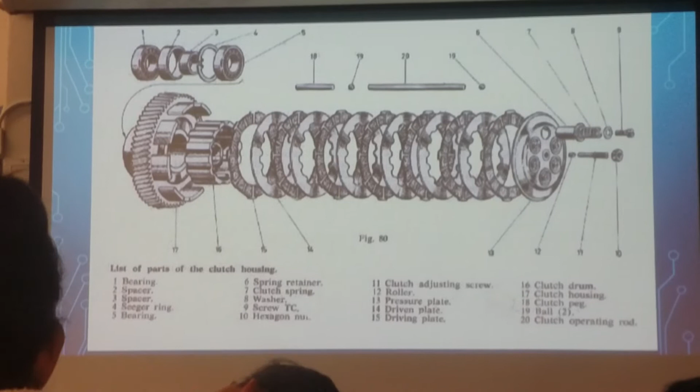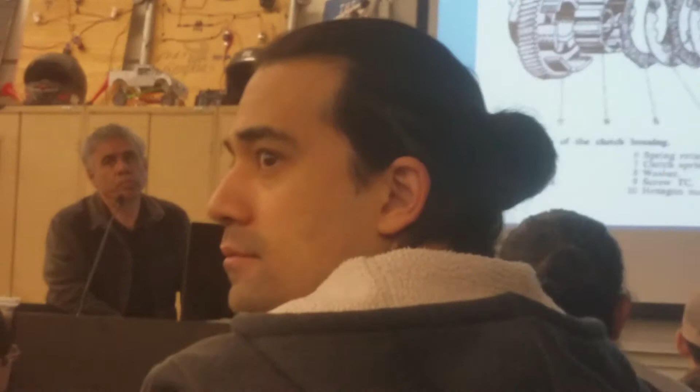Guys, when you say slippage, clutch slippage, that means what? The RPM is getting high. You can see it on the cluster, yes, but the speed is very slow. Yes. Slip is never here. Gears are not gonna slip. Gears are something else. Slip is gonna take place in the clutch. Slippage, that's what I meant with slippage. Yeah. Gears jump. Yes. That's like the worst thing. Somebody doesn't have power at the higher end. Yeah, different reason.

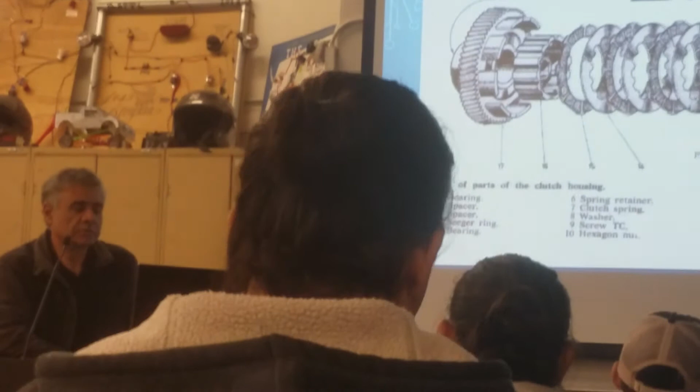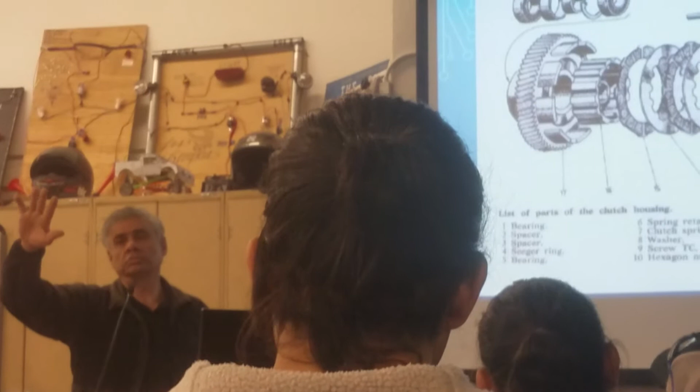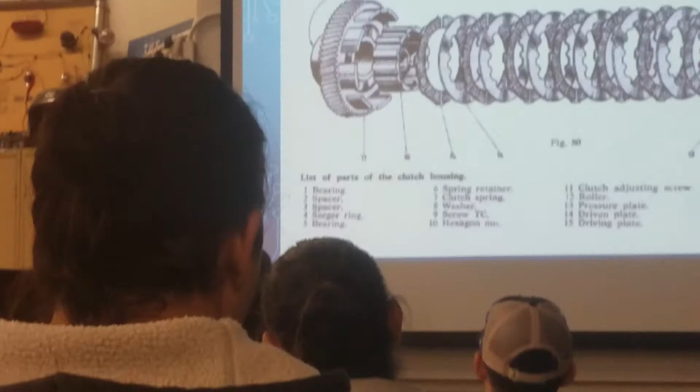Guys, I'm asking some questions. Master technicians, listen to me and answer me. If you have clutch slippage, what would be the problem? Give me 5 things right now. Worn drive disc. Somebody else, go ahead. Worn out drive disc, like the material on the disc. What else? The springs. If the springs are weak, guys, remember that. If the springs are weak, it doesn't give enough force on these pieces, it's gonna slip.

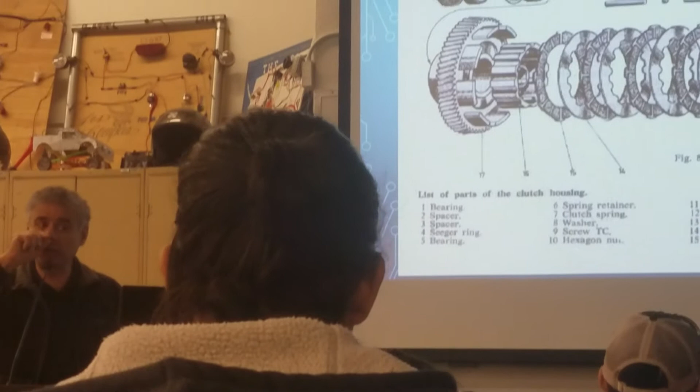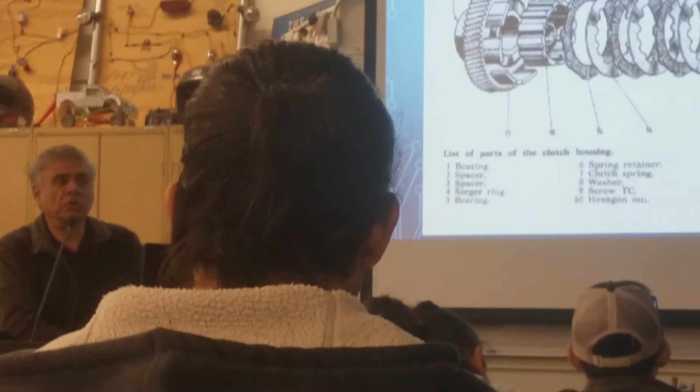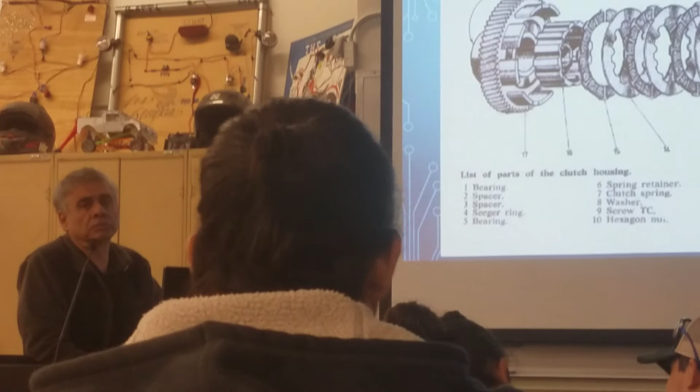So that's why the spring, when you guys order the clutch kit... They're not always springs though. Sometimes they're spring plates. If you get the kit from the dealer, did I get the kit from the dealer before, or did I get it from online? eBay. Get the kit from the dealer and see the springs in the new kit. They come with the clutch, friction plates, steel plates, and the springs. But the springs are weak.

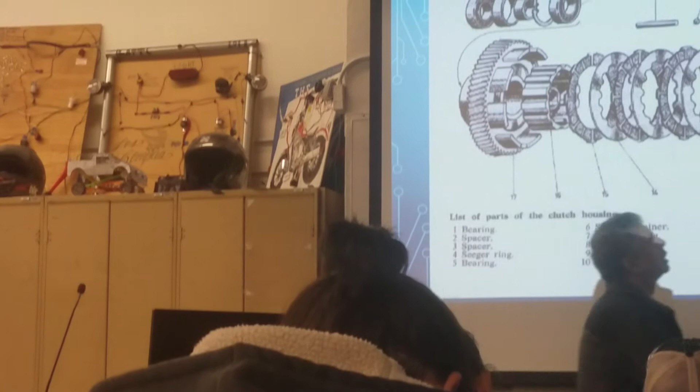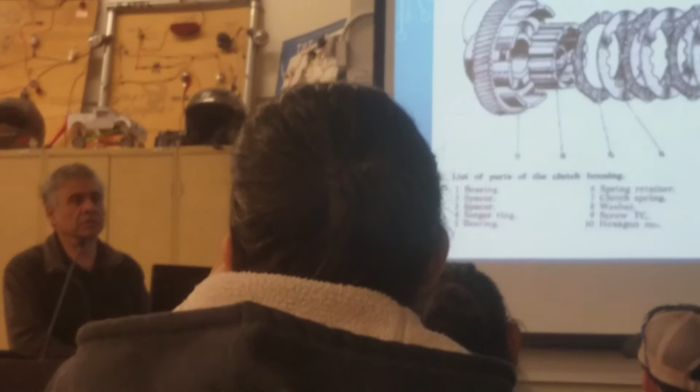What can make the spring weak? Like this one, how many springs do you have? You have 5. What can make a spring weak? Yeah. This one is called fatigue. Remember that term, it's called fatigue. Yeah, so you keep compressing the spring on and off 100 times a day. Over time, the spring is getting weaker. Now it doesn't give enough force to compress all these pieces together.

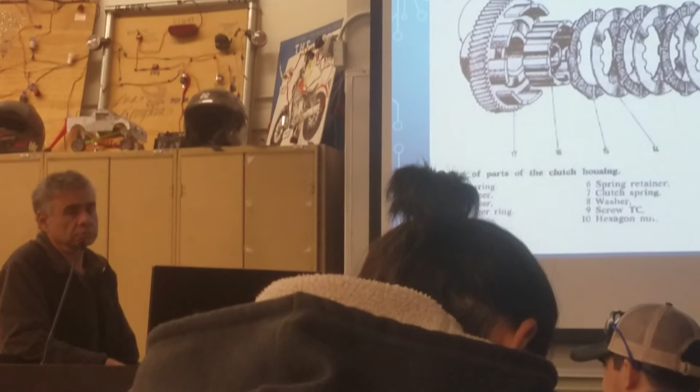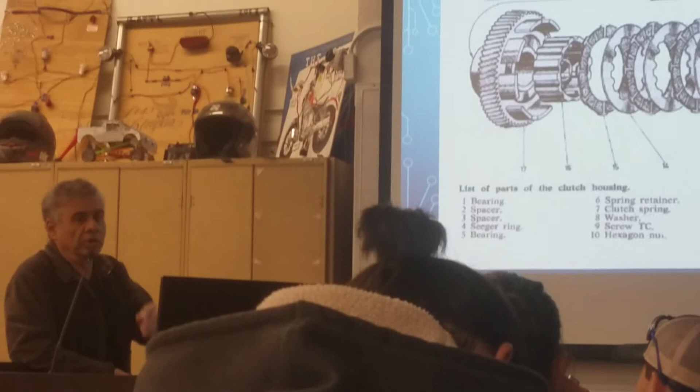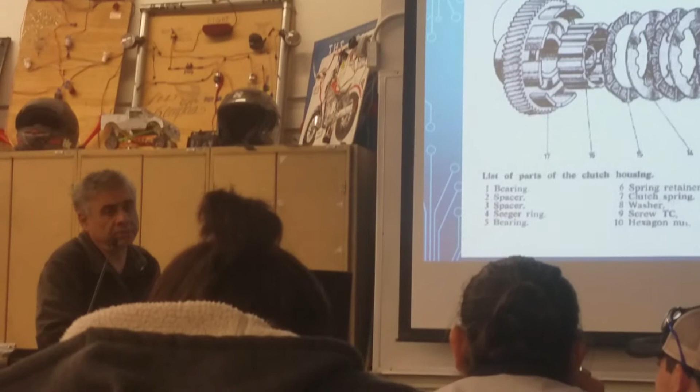Yeah, again, some people are not using the clutch right. Like you say, with the clutch, you should release the lever, not drop it. Because that drop is gonna eat some material from the friction disc. But you look cool. You can do it, man. It's like we have a heart attack.

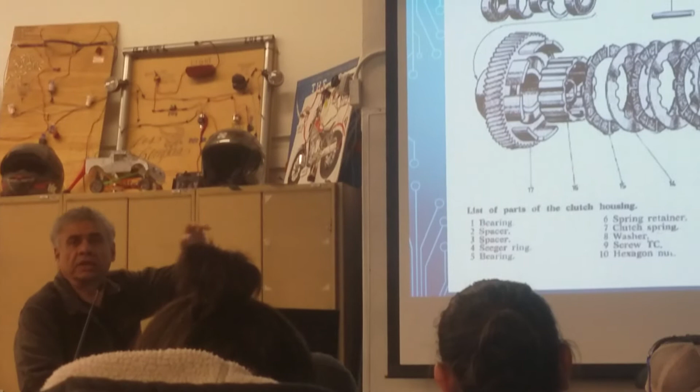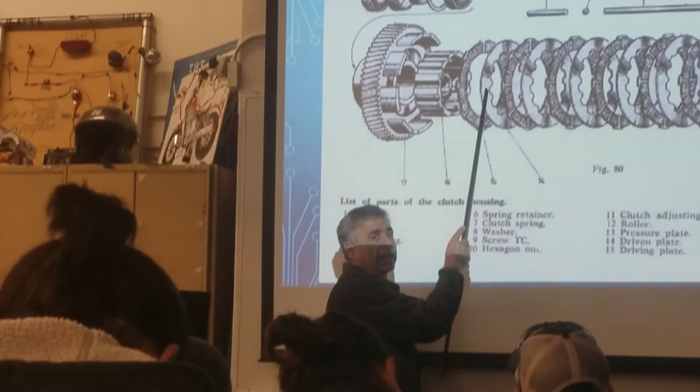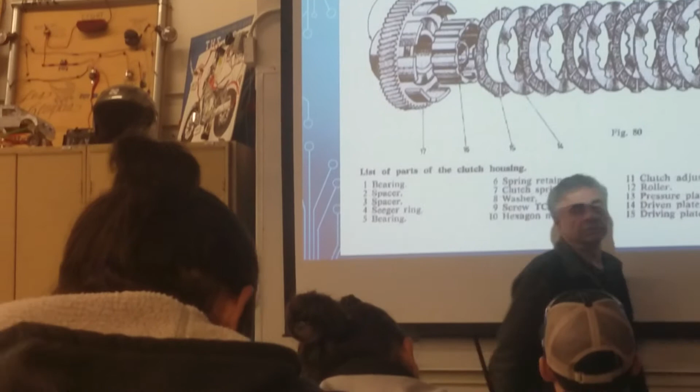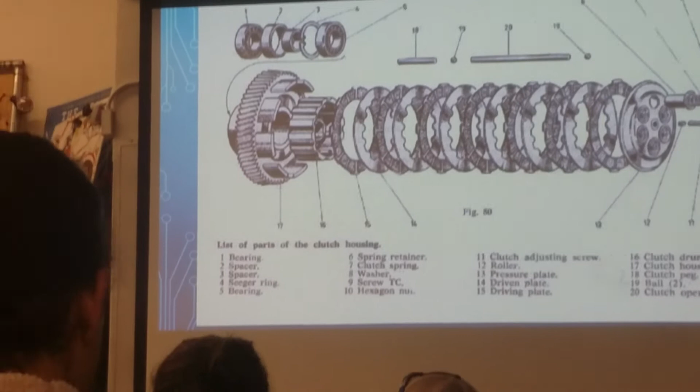Guys, I told you, give 5 things. So first thing, worn friction plate. Worn plate. How about this one? Worn steel. That's one though. Again, this one doesn't wear out like this one. But if this one is thin, it can affect the slippage. Worn plate, weak spring. What else causes the slippage? Adjustment. You have to have some kind of play on the clutch lever. If your clutch lever doesn't have enough play, most likely the friction will be high in that area, and that will make the clutch go down.

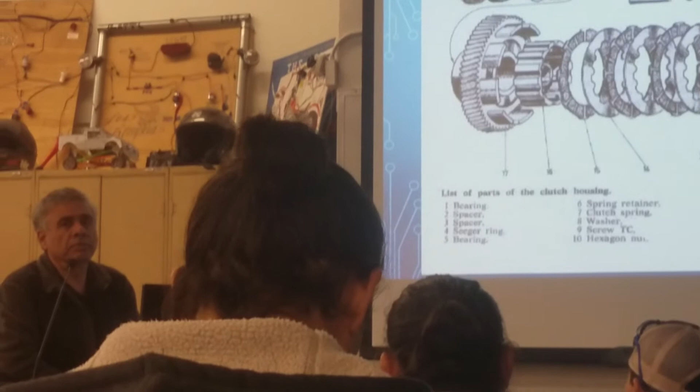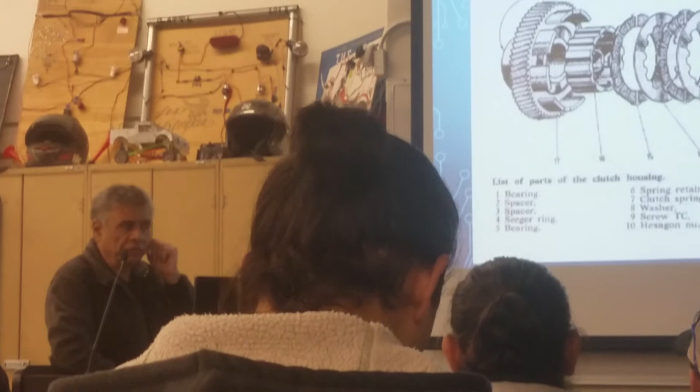What about the bearing, could it play a part? A worn bearing? Yeah. The bearing is not going to affect the slippage. Okay. How about if the bearing is bad? How about this bearing, guys? Can this one go bad? By the way, all this area is running in oil. I'm talking about a wet clutch.

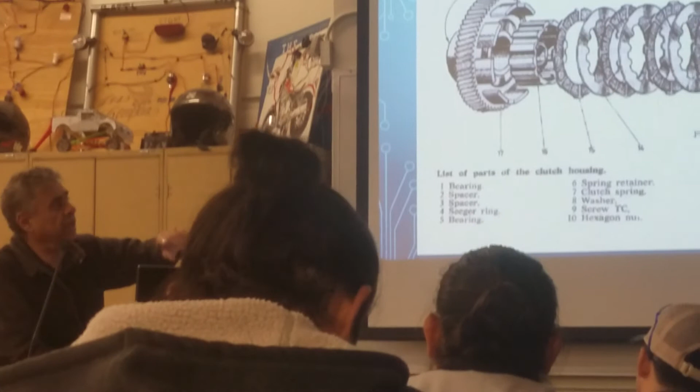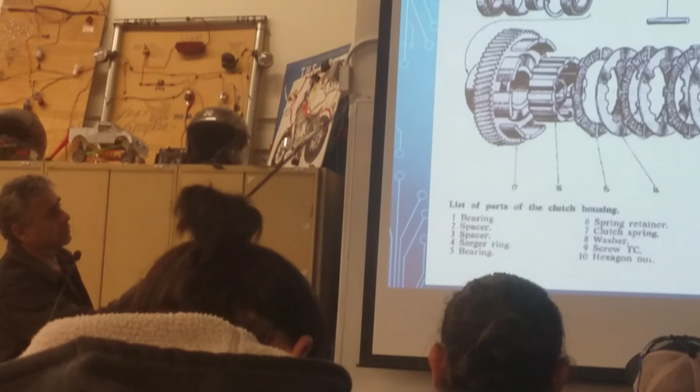Wet clutch. What's the idea behind the oil? What's that do? It's gonna cool down the area. Oil circulates, takes the heat away from the clutch assembly, and that system is gonna provide fresh and cool oil. This area gets so hot. That's why you need oil. Another question. Can the oil affect slippage? Think about it before you answer me. Can oil affect slippage?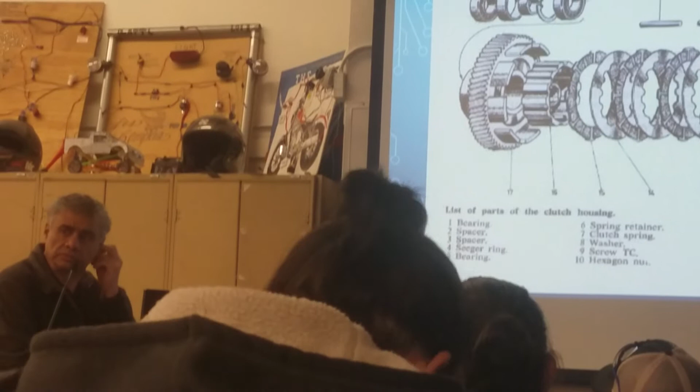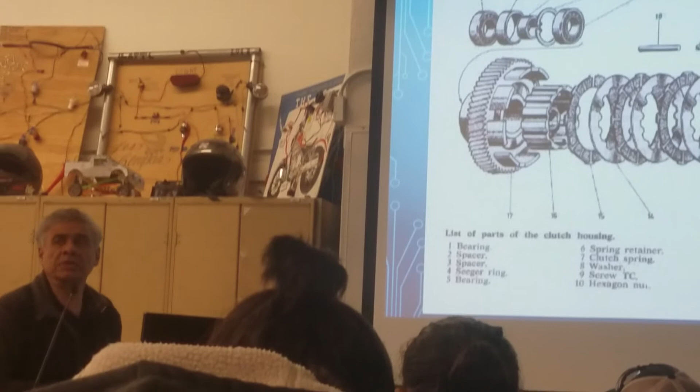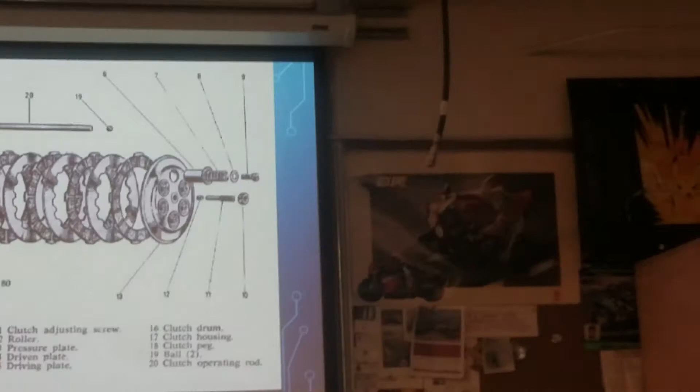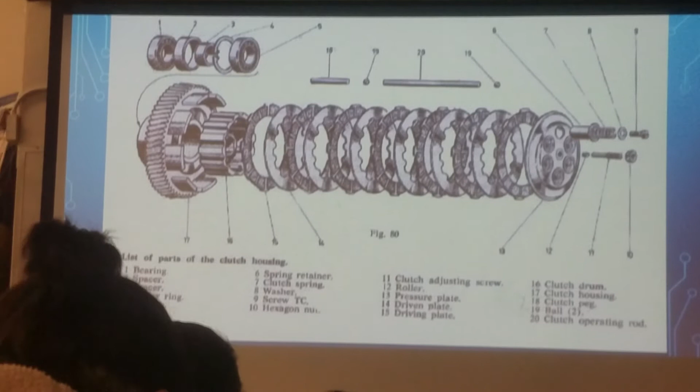Oil can affect slippage. You have to change the oil, especially if you have what's called a common sump. What do you mean by common sump? Common sump means the oil feeding the engine is the same oil going to the transmission. Same oil. That oil has to be changed on time. Otherwise, it's going to cause clutch slip. You have to change that oil according to the service manual. Yes, sir.

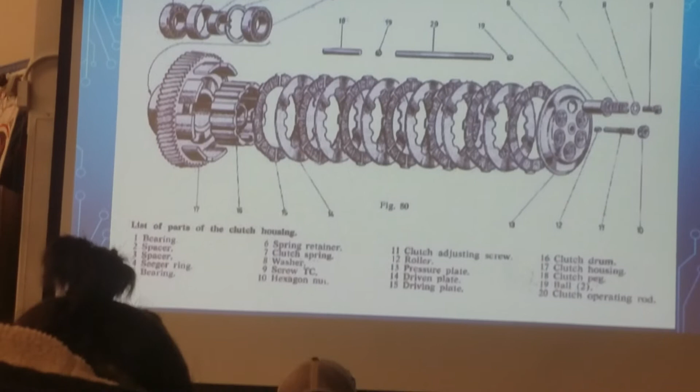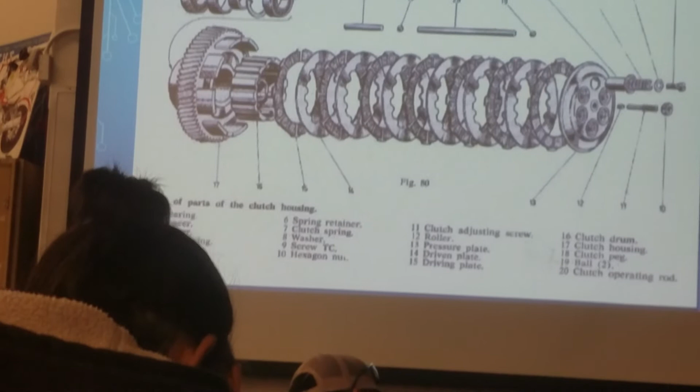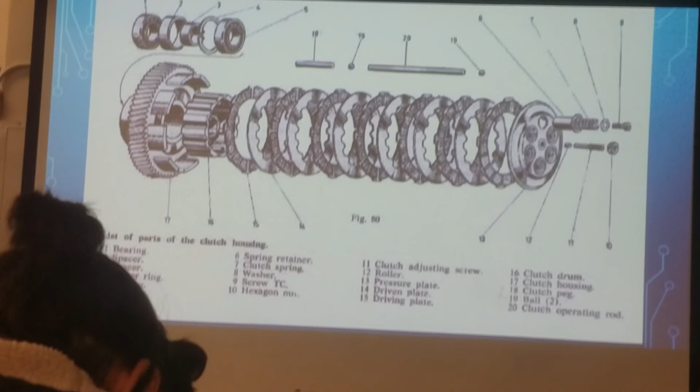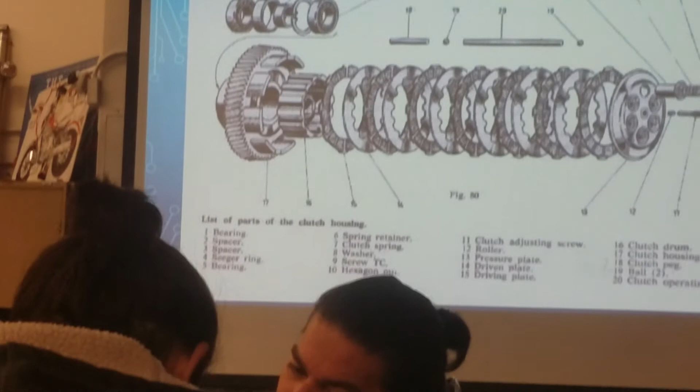On Harleys, the transmission and the clutch share the same oil, but Japanese, yes, normally they have a common sump. Like British bikes, Chinese ones are like that. You know how many different oils there are going to be. So oil affects the clutch slippage.

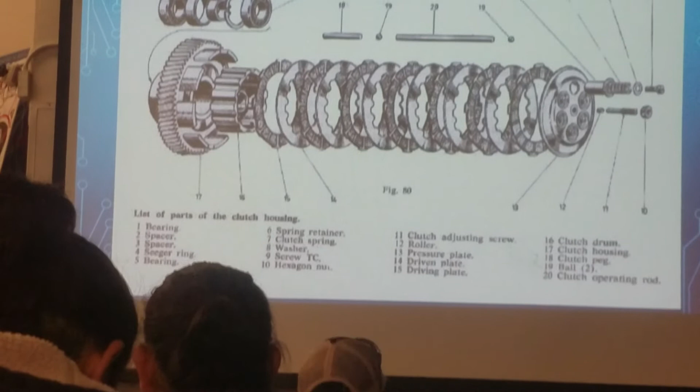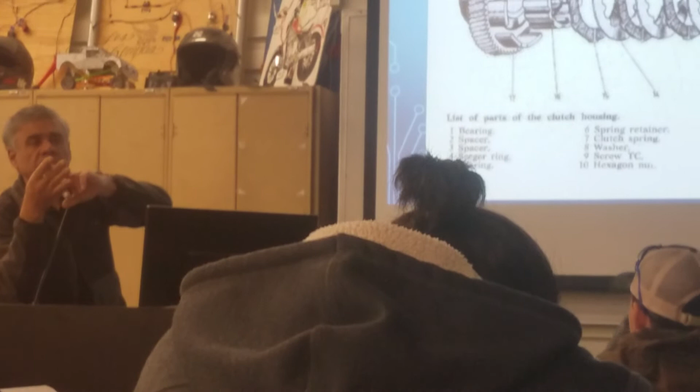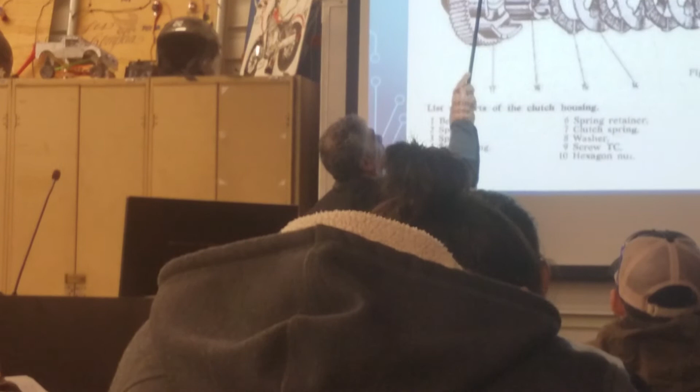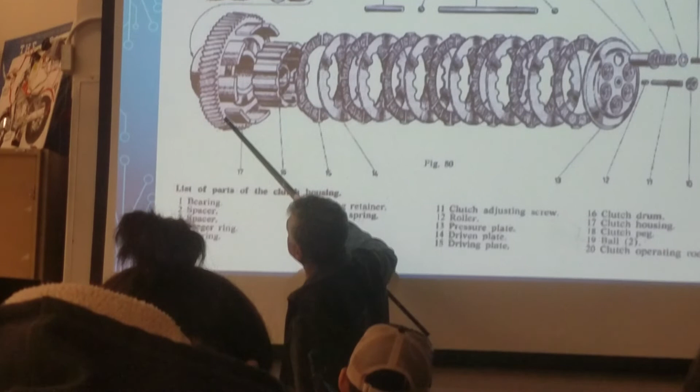Okay, I'm not done. I told you 5 things that can affect slippage. How many have we said so far? So friction plate, spring, clutch adjustment, oil. What's number 5? Guys, can you see the clutch basket here? If the tabs here are not clean, have grooves, it can create slippage. You see here on this one, that tab right there? See how clean? If you have grooves, it can affect slippage.

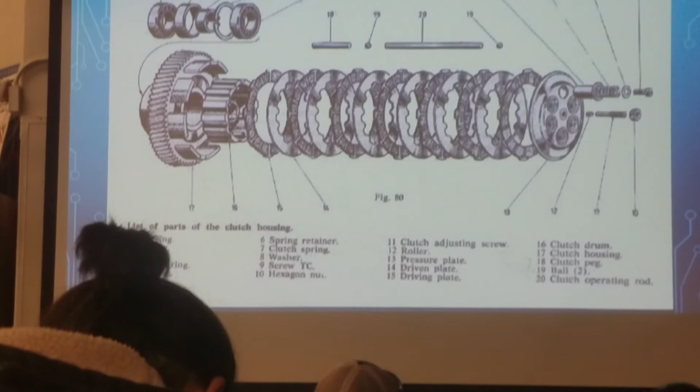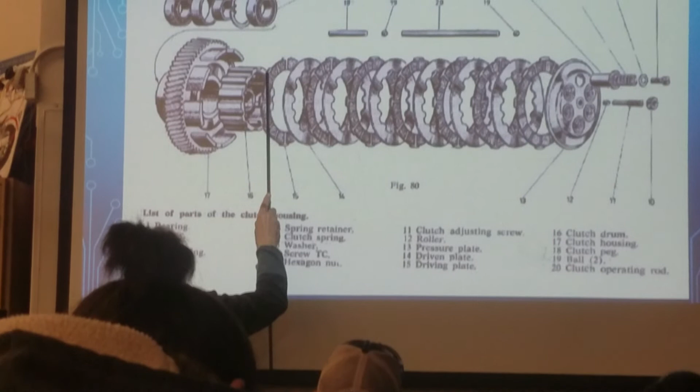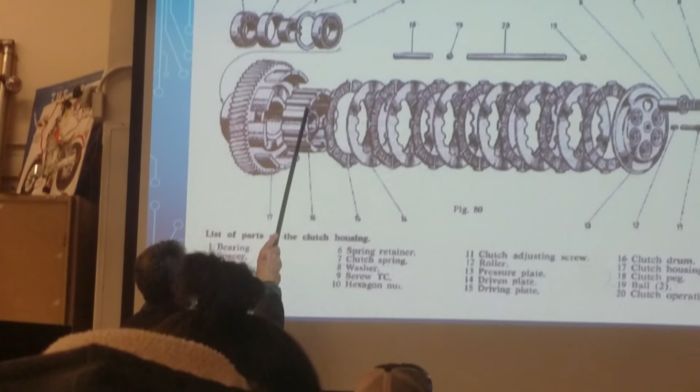Listen, can you see these teeth here in the back? This has to be very clean. Why? Because the friction plate is going to move a tiny distance. You cannot see it. So this area has to be straight. Same thing with the hub. Can you see these teeth? It has to be 100% straight. If you see any dents right here, slippage will take place.

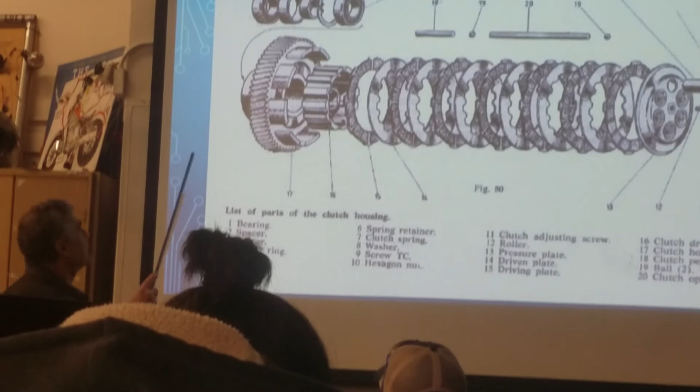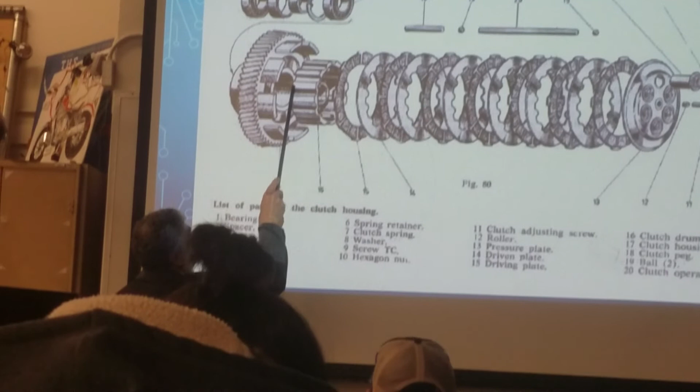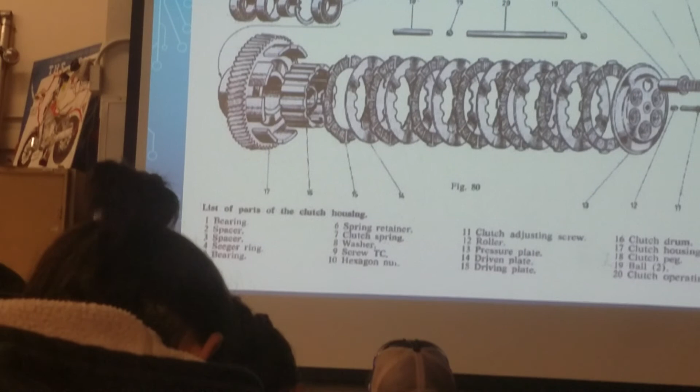One more time? Yeah. Everyone see the teeth right there? That teeth has to be perfectly straight. You see it right there, and you see it on the spline right here. If the teeth have some kind of dents right here, it can affect the slippage. It also damages the friction plate. Anyway, you gotta put in the new kit. It doesn't come with it. But if you see dents in this area, that thing has to be changed.

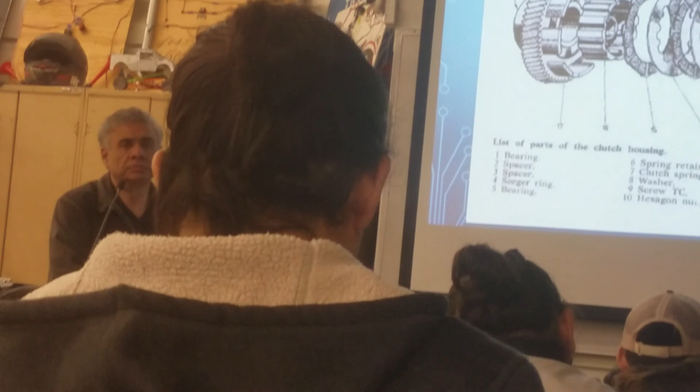That's 5 things, guys. You get those 5 things? One more time? I got 4 of them. First one, worn friction plates, that's 1. Number 2, weak springs can create slippage. Type of oil, that's number 3. Clutch adjustment, that's number 4. Worn basket tabs, that's number 5.